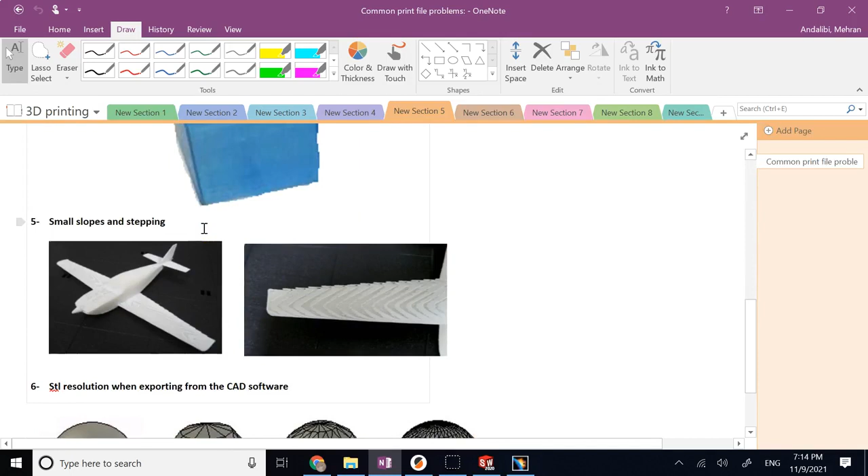Hello everyone. In this video, we are going to talk about some common errors and mistakes that exist with print files that you want to either 3D print yourself or send to somebody else to 3D print for you. If you can avoid these problems, your 3D printed part would most probably have a lot less issues and look a lot better.

What are they? One of the problems is improper tolerance of joints. So if there are parts that go together and are assembled together, the major thing is you make sure they can be assembled.

Plastic parts are not similar to metal parts, where when the male component is a little bit bigger than the female component, you can use heat treatment and press fit to create what we call an interference fit, where the two parts are hardly separated from each other.

In plastic parts, it's not that easy. Plastics do not have as much thermal expansion as metal parts do. So if you make the bottom part that needs to go inside the top part a little bit bigger, it's not so easy to assemble it.

And if you apply too much pressure, these plastic parts will definitely break and deform. So you need to make sure that most of the time it's either a clearance fit, where the male part is slightly smaller than the female part, or very close so with reasonable force, without breaking the parts, you can do a transition fit. But definitely an interference fit is not a good idea with plastic parts. That's problem number one you see in assemblies.

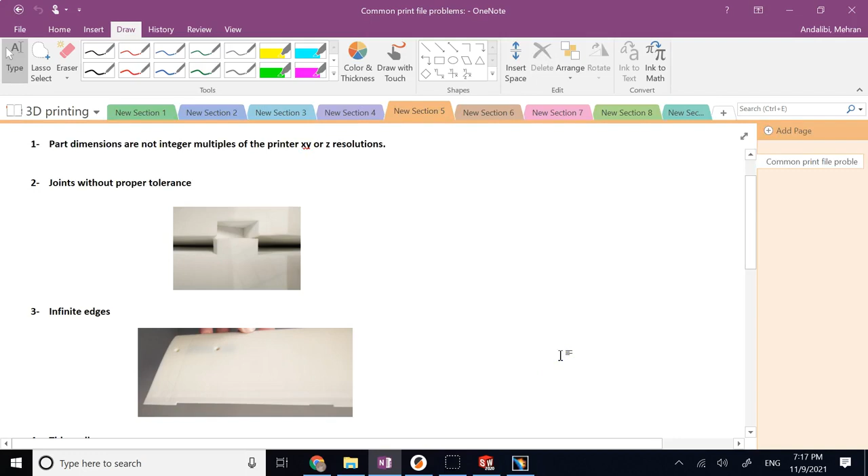The printer could not print it, or there was failure during printing those very sharp, thin edges, as you clearly can see here. Some parts of the trailing edge of that wing are missing, it was not printed. Here I'm going to show you a demo of that.

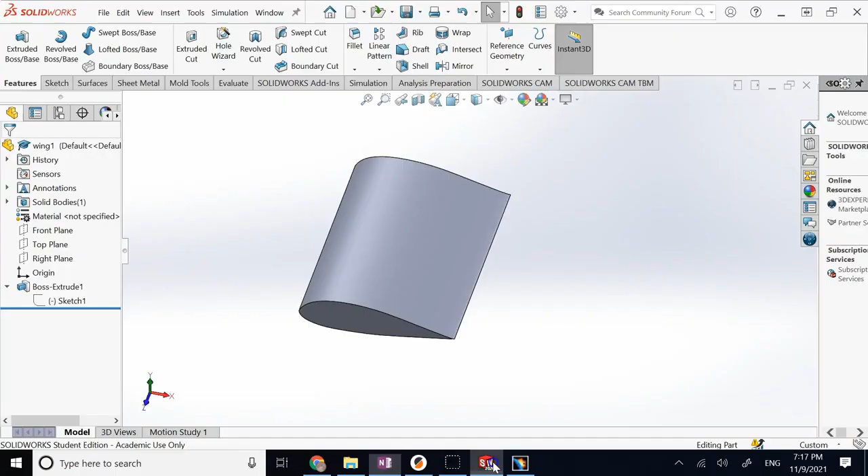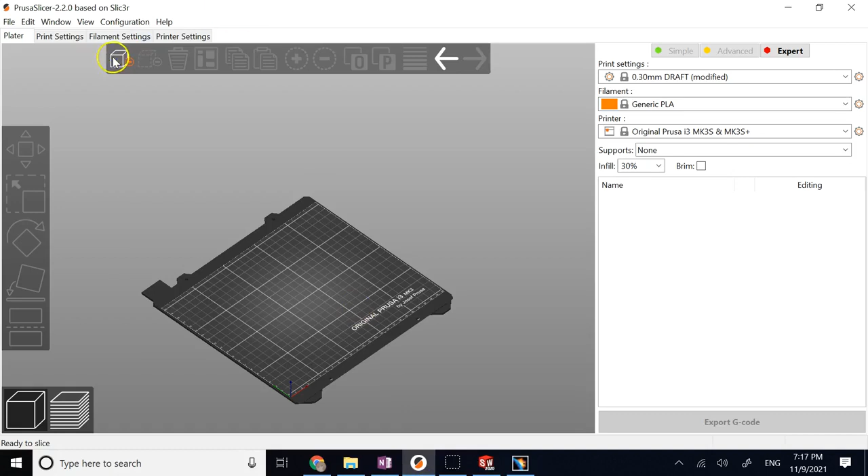So here is a wing, a simple wing, of course not super realistic. I made this trailing edge very sharp and very narrow at the end, deliberately. So if I go ahead and export this as an STL file and bring it into my slicer software, let's see what happens. Here I bring it in and print it upright to avoid any support.

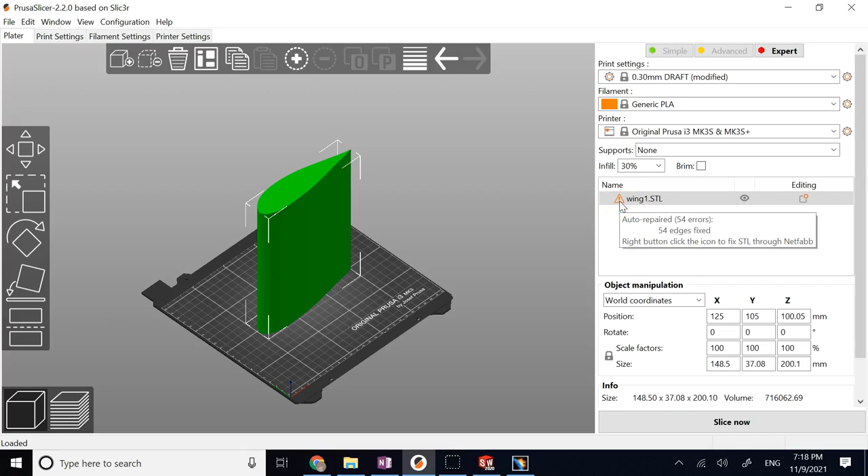First of all, you see right off the bat it gives me an error. There are some edges which definitely have errors. If you ever see this - and I'm going to address all of these issues and everything you need to know about Prusa Slicer in a separate video next - but if you see that exclamation mark, it means you have to fix the rest of the errors. There are probably non-manifold edges or other errors you have to fix. So do not slice right off the bat.

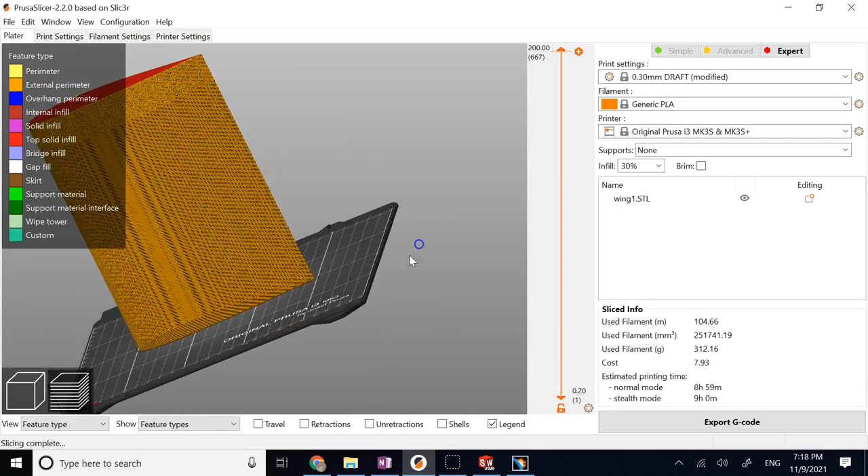Right click on this and let it repair those edges. When that goes away, go ahead and slice. Now see what happens when I look at this. This is the skirt, this dark brown one, but let me go to the very base of the part here, so now you clearly can see what is happening to this edge.

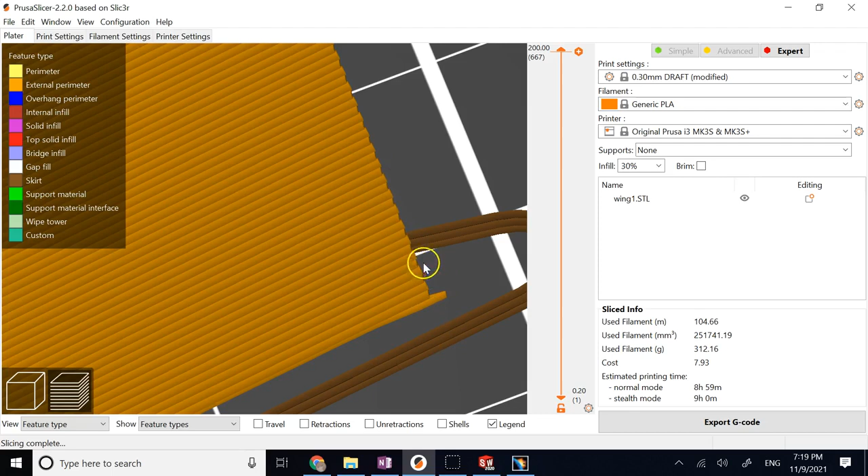First of all, on the first layer it could get it as sharp as possible, but on the rest of the layers, you clearly see some parts of the trailing edge is missing. And if you look at all of this jaggedness, that means this edge is definitely not going to be a clean edge. You clearly see the rest of it is missing, it's just the very bottom of it that you can get.

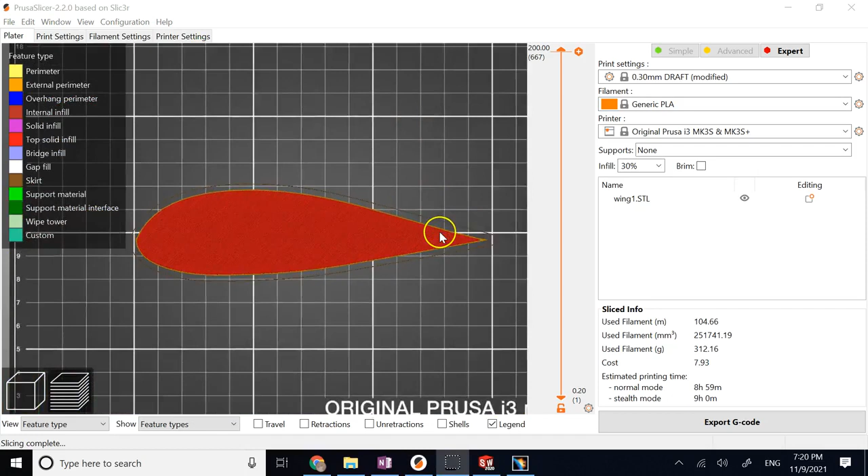And I'll show you the top view, and if I zoom again at this trailing edge, you clearly again can see that there is this area here.

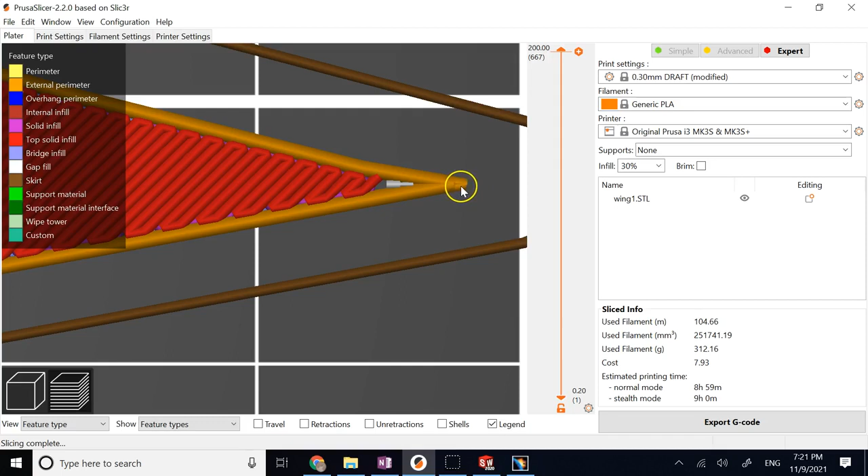You see this line? That is where for the first layer it could print the sharp part of the edge, a little bit of it, not even the entire part of what you have in CAD, but for the rest of the layers it couldn't.

Now when I switch from the slice mode to the 3D editor mode, see that this edge extends, okay? But when it came to printing it, it had to cut a portion of it off because that was too sharp and too narrow for the printer.

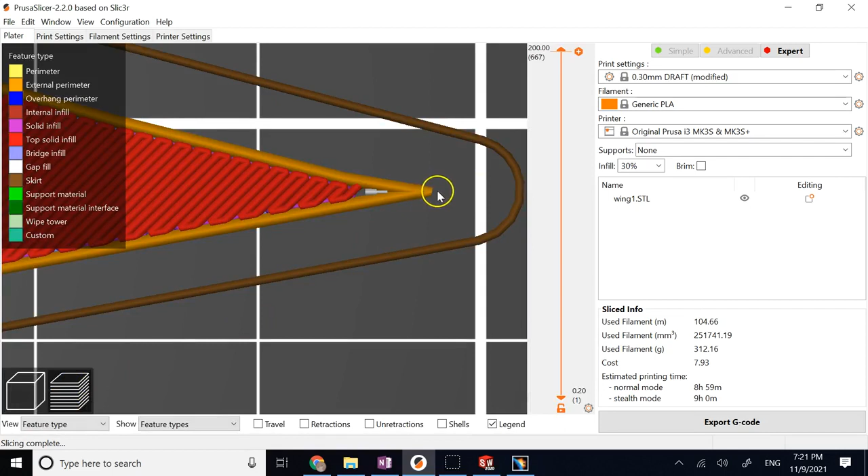Look here, you see the difference that this tip point has with respect to my grid line of the printer bed. And now look here, you clearly see this gap is definitely bigger than what you have here. So this very sharp end of it, from this point to the right, it could not print.

The best it could do is try to get closer to it in the first layer, but for the rest of the layers, you definitely have a failure.

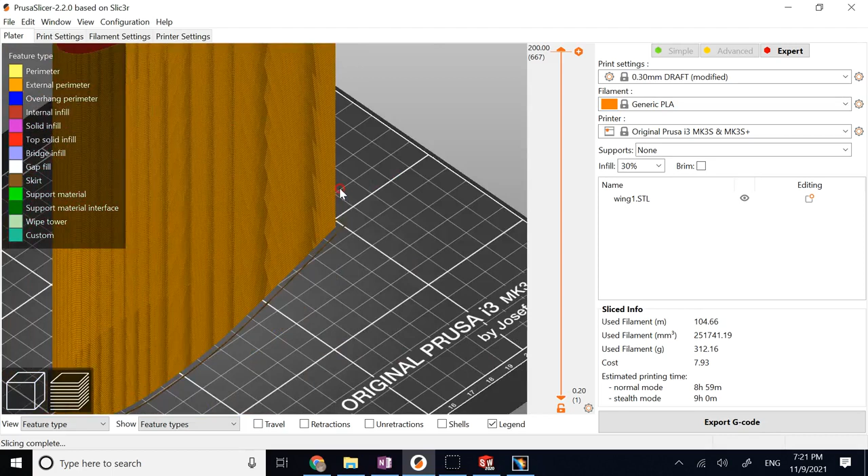Even if you try to improve it a little bit, there is still always the chance that you get a very bad edge or some parts of the edge missing, as I said. Call it an infinite edge. So if you want to avoid such a thing, make sure the very tip of very narrow areas like this, you try to cut it, put a chamfer to it or something to avoid that sharp of an edge.

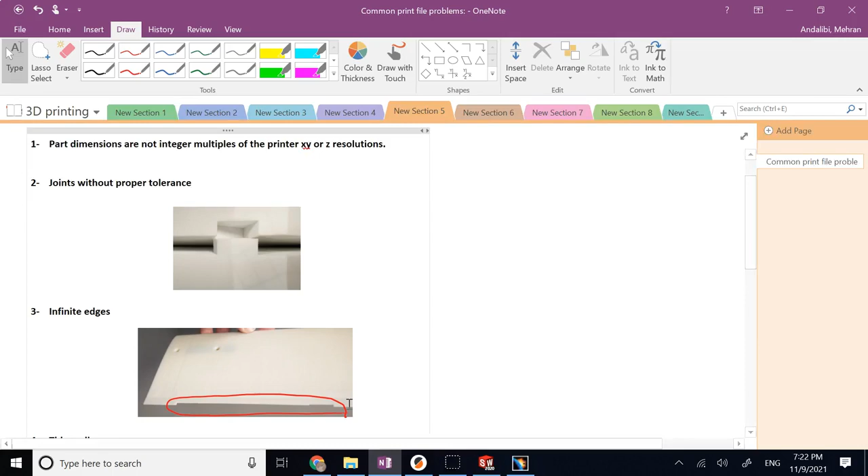So if I want to go back here, right? As I said, either you can apply a chamfer or you modify your sketch. You see clearly my sketch is definitely way too sharp.

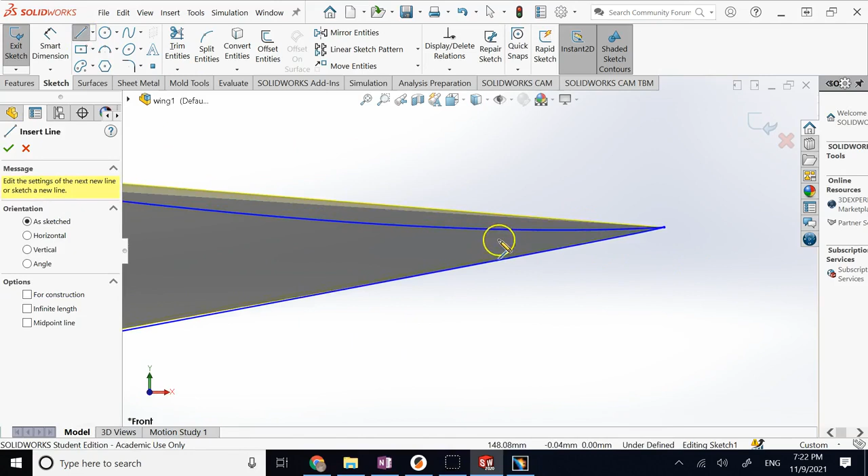If I wanted to modify this, I bring a line here in SolidWorks and try to just cut from this part on. Draw a vertical line like this, and then trim the rest of it like this.

Okay, so now it is definitely a lot better. It's not going to be as sharp as that, and hopefully it can handle it. Again, most probably not so much, because this edge that I made is still in a very sharp area, right?

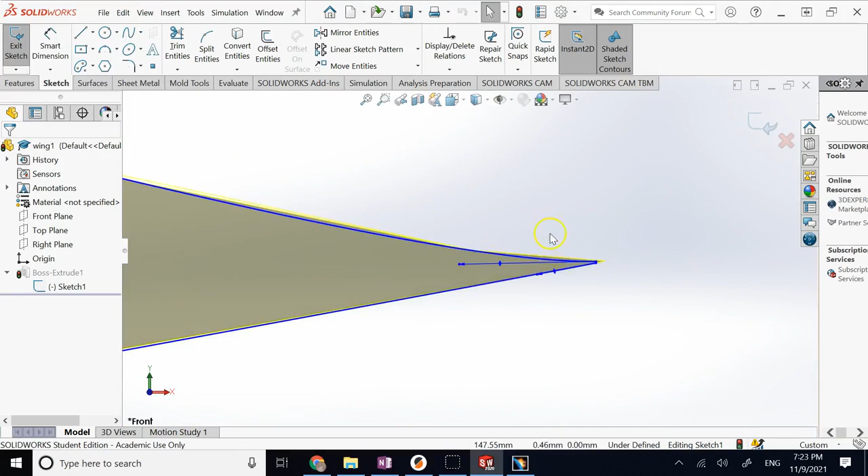But if I can show you, maybe I can move it a little bit further to the left. Let's see. Okay, most probably this is going to ruin my profile.

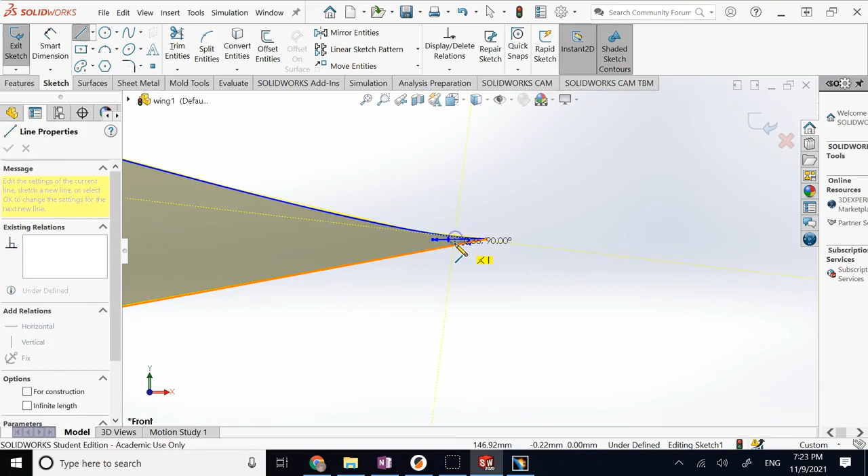So what I can do is go ahead and bring the line further a little bit more to the left, so maybe something like this. Okay, and then retrim again the rest of it.

So make sure that you do not really leave something super sharp behind. And now, you see, that's a lot more reasonable this time, hopefully.

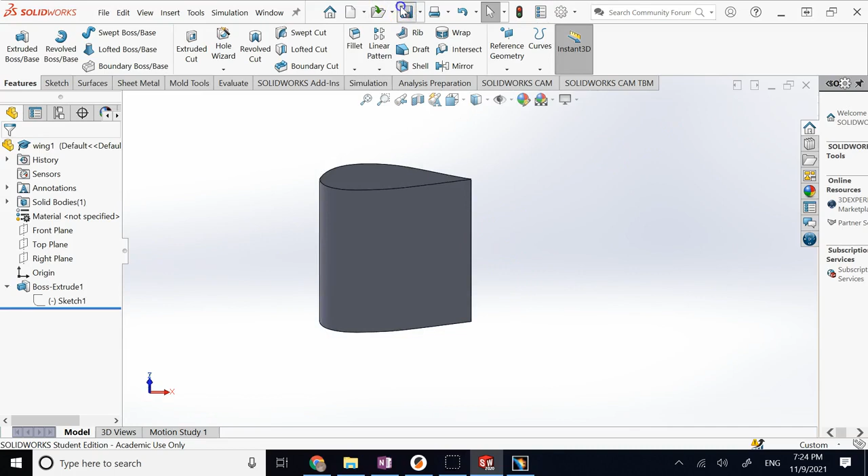Let's go ahead and save it and export it as STL again, override the previous one, and then re-slice it, and you'll see what's going to be the difference.

So here I bring it again. If there is an error, again, I make sure I repair it, slice it. And now let's go ahead and check the bottom here. You still see there is a little bit of that left, as you can see.

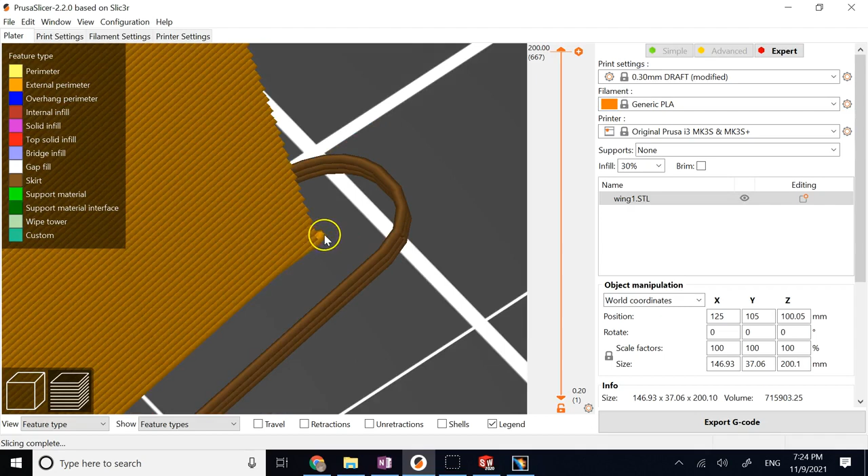You absolutely see there is still not an amazing job, but if I look at this guy from the top now, in the slice model and in the 3D model, there should not be a huge difference between them.

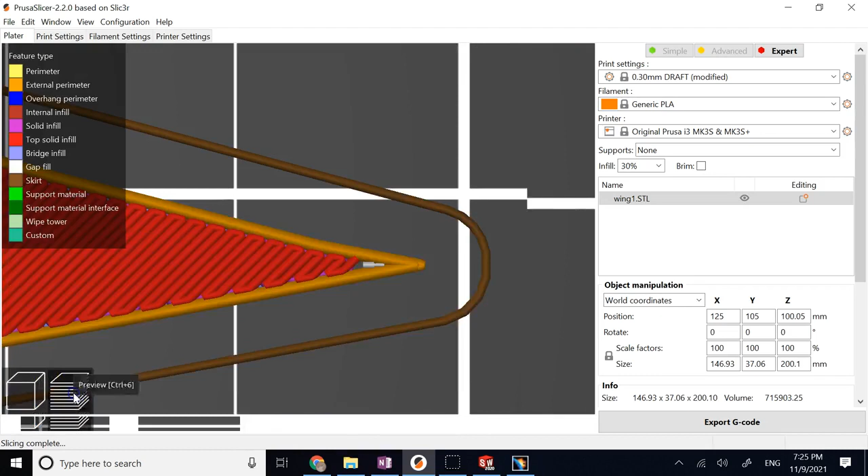So you see now they are quite closer to each other, right? There is not a huge difference between those two gaps that I showed you.

And again, if it's still too sharp, I would trim it a little bit further back, right? So just go back here and redo that.

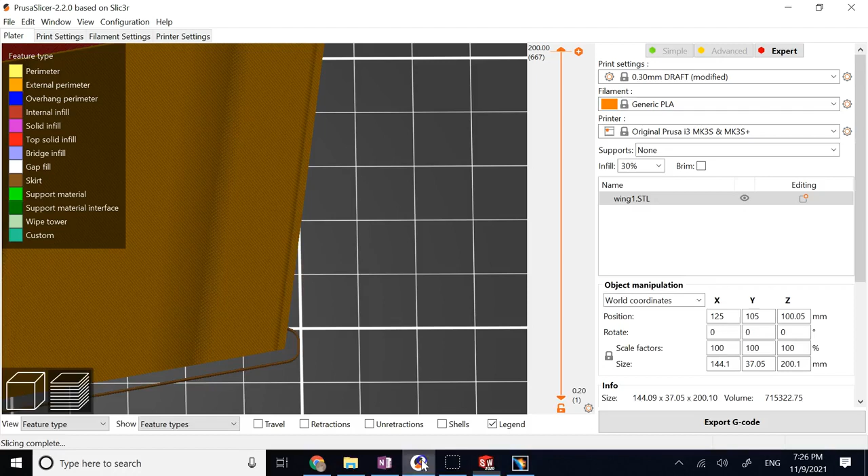Here we go. So I trimmed it a little bit further, and now you clearly can see that I don't have any discrepancy at the bottom layer, right? And the edges, the end of the layers seem to be very well aligned with each other, right?

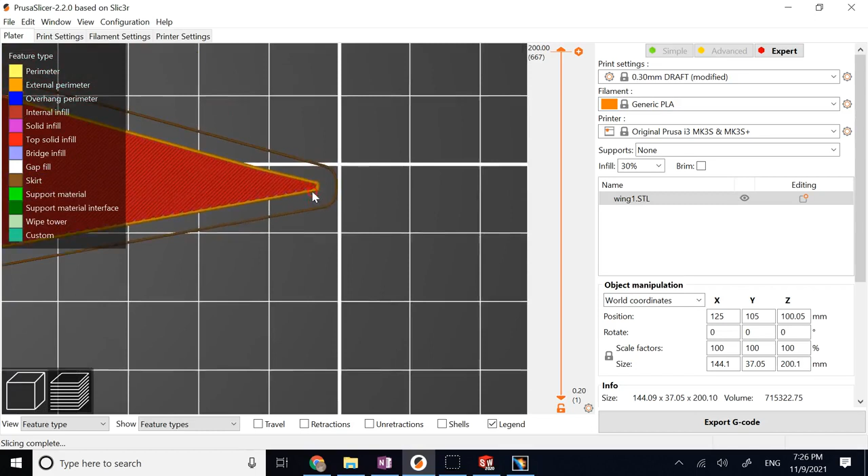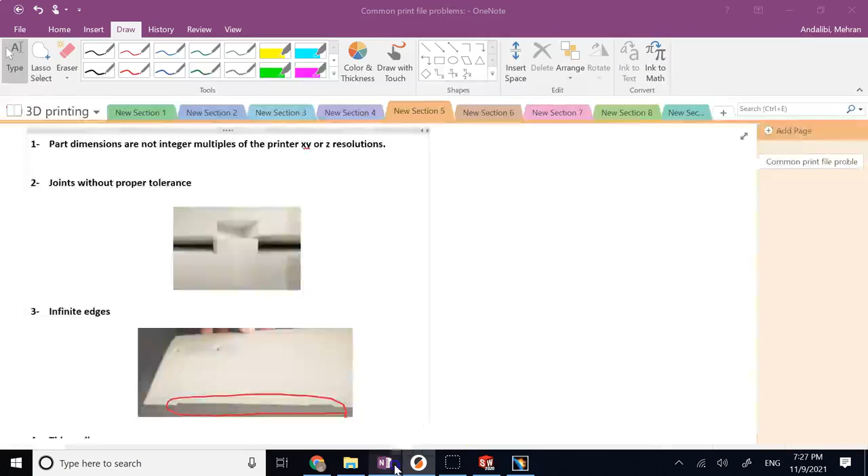And if I look at it again from the top, there should be really no difference anywhere between the layers, and then between the 3D model and the layers. Okay, so make sure to avoid infinite edges.

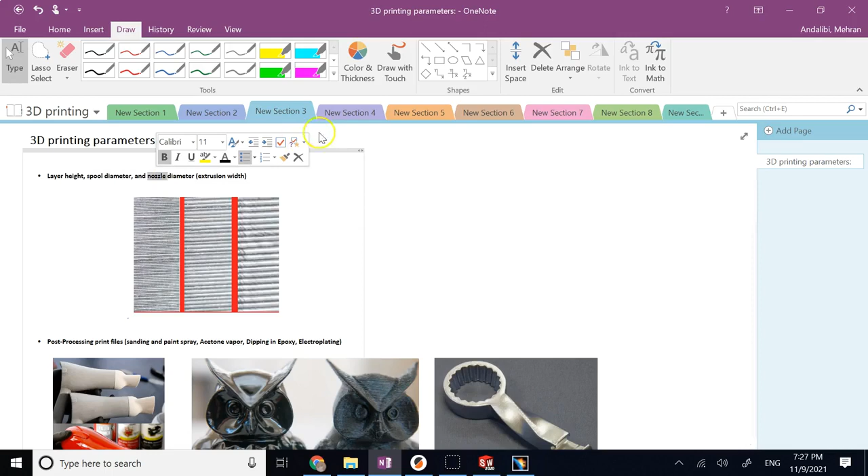Now, another important thing is the dimensions of the part. Remember that, as we discussed in our previous video about the 3D printing parameters, we have a layer height and we have the nozzle diameter, and those will determine the resolutions of X, Y, and Z plane.

So if your nozzle is 0.4 mil, that means the minimal thickness you can achieve on the XY plane, on any flat plane, on any layer is 0.4 mil. And if the layer height that you choose is 0.2 mil, that's the best you can get. So you have to make sure the overall height of the part is an integer multiple of 0.2 mil, and any dimension in the X and Y is an integer multiple of 0.4 mil.

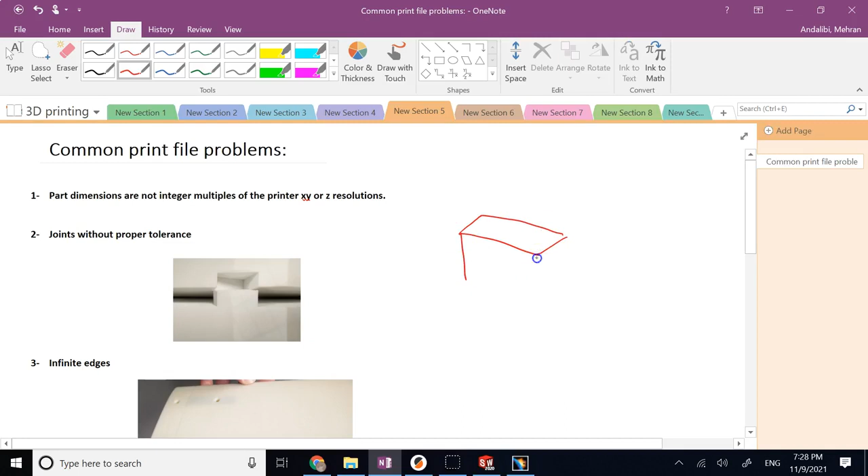Let's say you have a simple cube that you want to print upright. This width has to be an integer multiple, like n times 0.4 mil. And this depth also has to be n times 0.4 mil. Now, it might not be the same n, so you might call them n1 and n2, because along the XY plane, where the width and depth fit, there is a 0.4 millimeter thickness or diameter of the molten plastic. And the Z, or height, should be another integer multiple, n3 times the layer thickness. If the layer thickness is 0.2, it should be a multiple of that.

Why is this important? Because sometimes I see students make parts and submit them to our lab for printing, but they make this width to be, let's say, 12.1 mil, and this other dimension to be 5.3 mil. Well, the problem is this: 5.3 is not an integer multiple of 0.4. The same thing for 12.1.

So what's going to happen is the printer has to skip a layer or add a layer, and it does it by rounding. So for this case, it would round this to 12, the closest integer multiple of 0.4 to that number. And for this one, if it rounds it, it rounds to the closest multiple of 0.4, which is like 5.2 in this case. So the dimension that you will actually get for that W and D you designed is going to be 12 by 5.2, not 12.1 by 5.3.

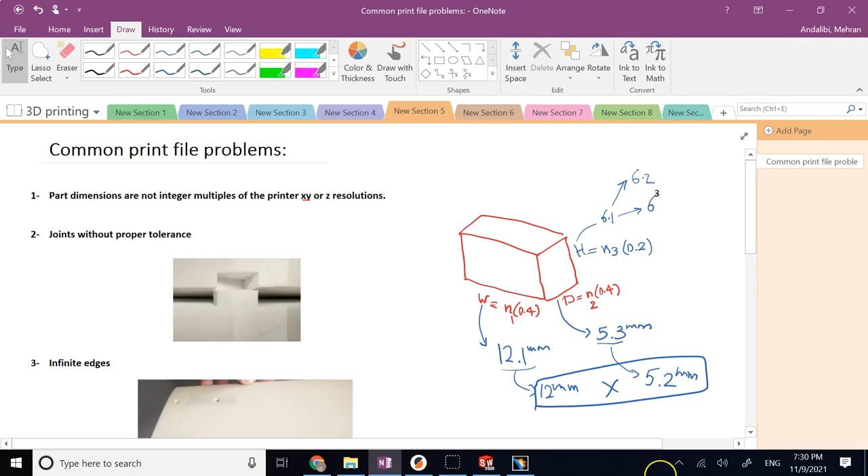And here I'm going to show you that in an example.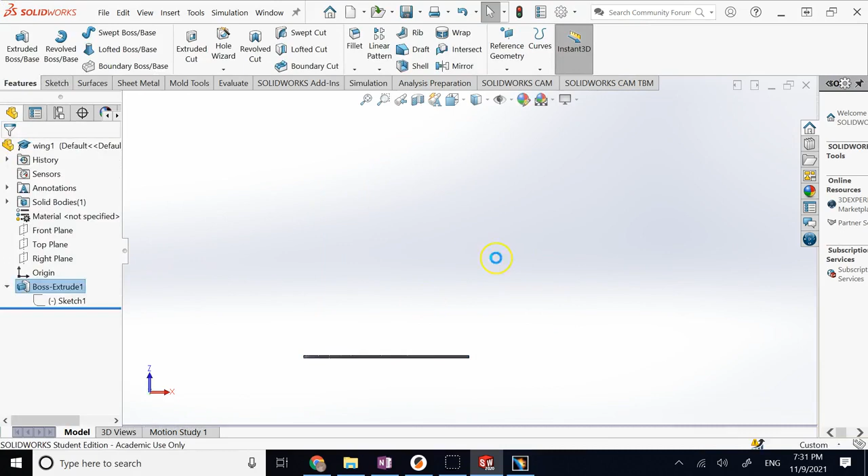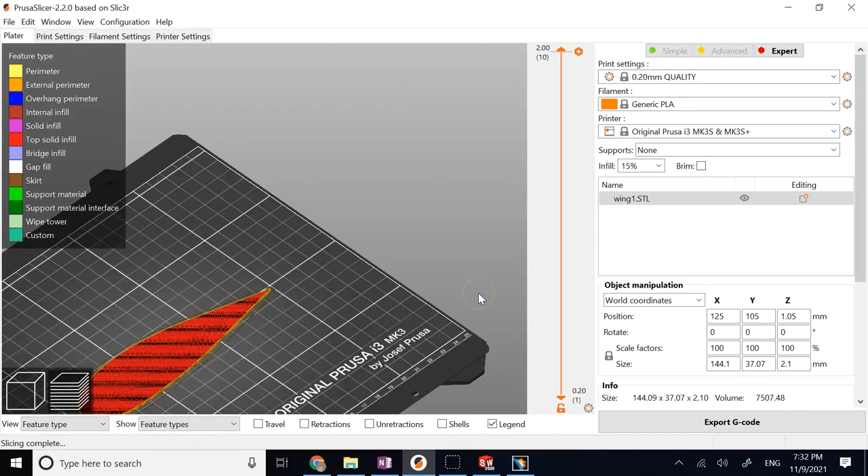So here I'm going to make this part, it's a little bit too tall. Let me reduce the height of this. So I make the height maybe 2.1 mil, something short like this, flat. And then I'm going to save it again as STL, import that flat piece, and now I'm going to slice it. I expect the overall height to be what? Let me change this to 0.2, which is the layer height I said you can normally have on a Prusa, although you can go further down. But here I did that.

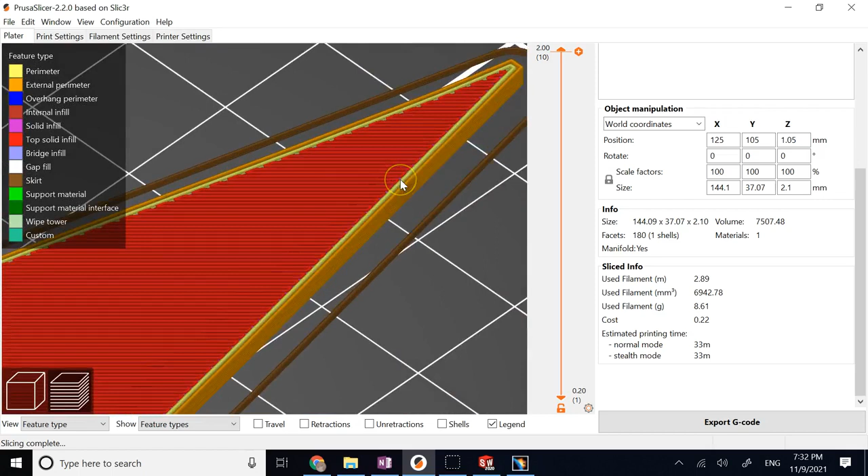What's going to happen here? You see clearly the Z direction, the height of the imported part is 2.1. Now, will you get 2.1 in the real world? Let's go ahead and count the layers. So we count each layer we get and multiply it by 0.2. Starting from here: 1, 2, 3, 4, 5, 6, 7, 8, 9, and 10. So you will get 10 layers. And 10 layers times 0.2 is 2 mil, not 2.1. You see?

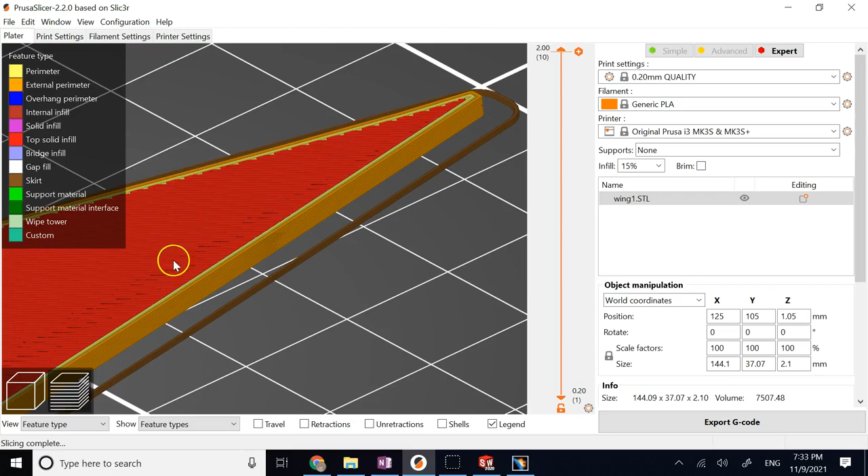You cannot get half a layer. You either get no layer or one layer extra. So definitely that's not a good idea to go with the dimension of 2.1. And the same thing happens again if you choose the other two dimensions not to be an integer multiple of 0.4. So make sure that you choose your dimensions right.

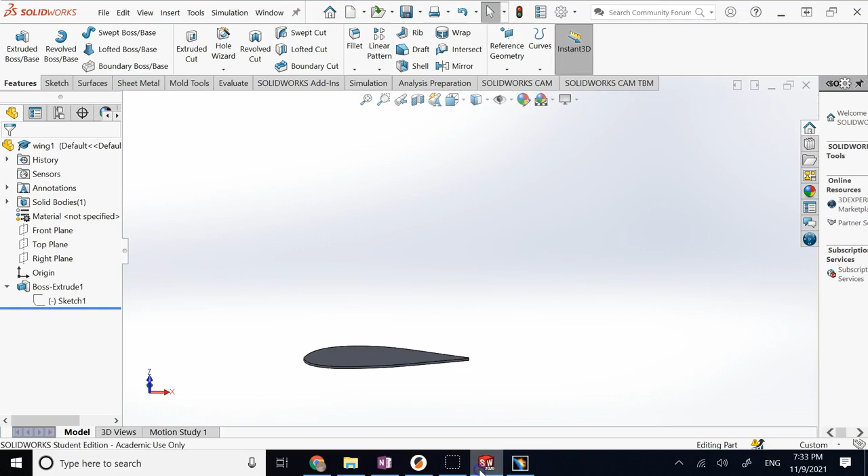One other thing that many people choose and want to print, which I mentioned in my previous video, is parts that are shelled with very, very thin walls, like as thin as 1 layer. That's absolutely not a good idea. So you might have this part and shell it with 1 layer, like 0.4 mil. Here I made it a little bit taller and exported it as STL, and let's go ahead to the slicer software and try to slice this very thin-walled object, see if we can get anything.

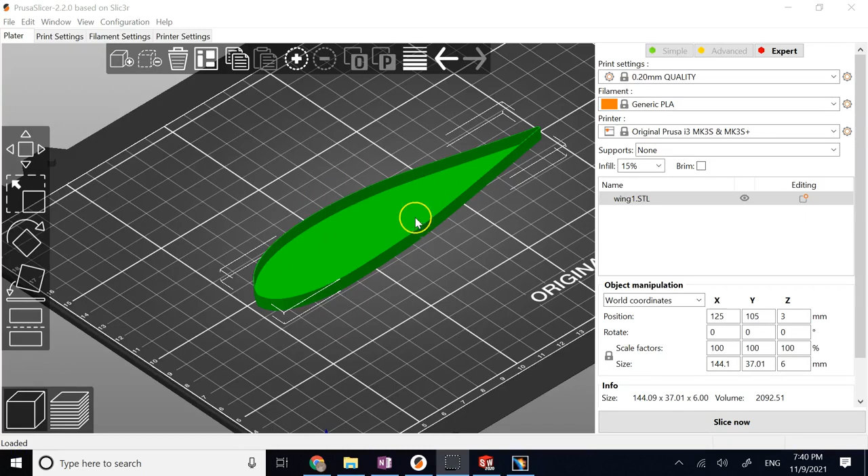So here is the part, that's the STL of it, and as I said, I made the walls a little bit taller. Let's go ahead and slice, and you're gonna see something interesting. First of all, it cannot even get the walls for you. Although they were 0.4 mil, in the software setting, if you go to print setting and look under advanced, you see that the default extrusion width is actually a little bit more than 0.4.

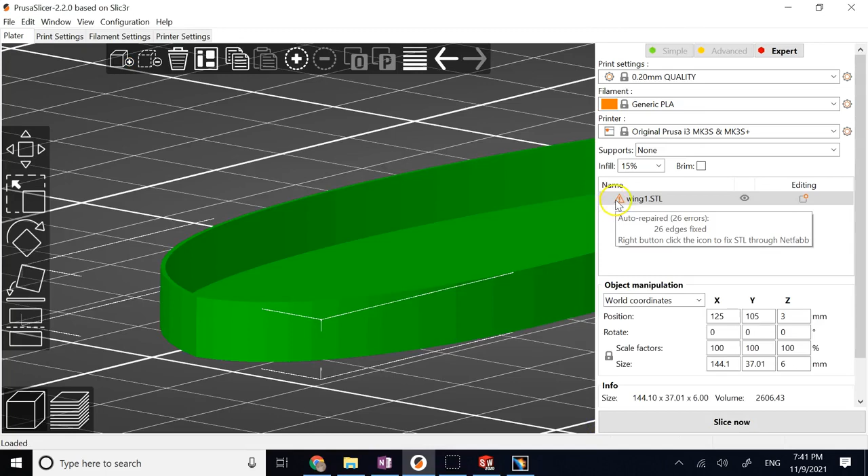By adjusting the speed of the print, you can even change that 0.4 to something a little bit more or a little bit less. Because this one is 0.45, that means you are not even getting that 1 layer. So I have to go back here and change my shell to maybe 0.45 or 0.5, make it a little bit thicker, so hopefully it can give me 1 layer. And even if it does get to slice it, it's absolutely not a good idea to print something that thin.

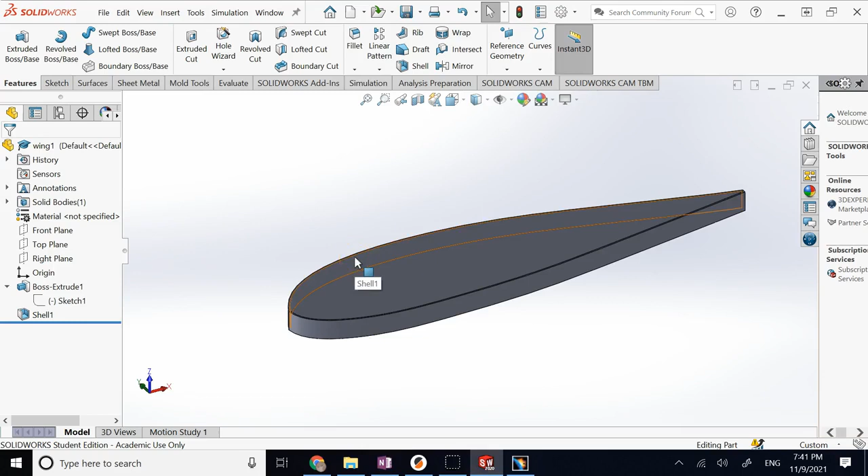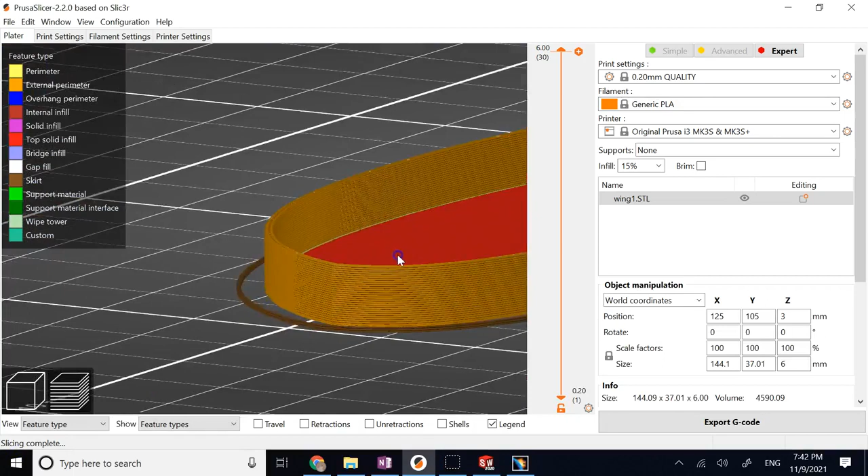As I said, by no means go for designs like this. Make sure the shell thickness is at least minimal 2 layers. Definitely if you want something here, 2 times 0.45, you want 0.9. That's like the minimal thing you want to avoid artifacts like that. And here, that's what you can see - I changed it to 2 layers. So now at least you're not going to get discontinuities in the print, and hopefully it lasts a little bit more, although definitely not really some wall that you want to apply any force or anything to, but at least it can print it. So keep that thin walls in mind.

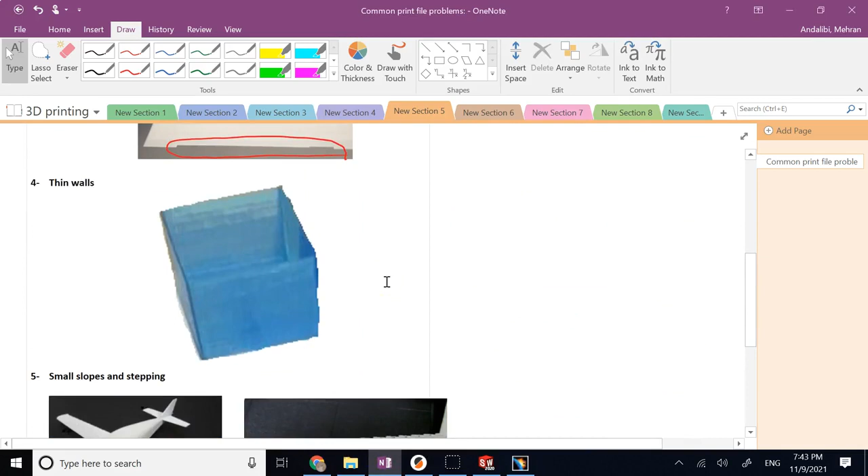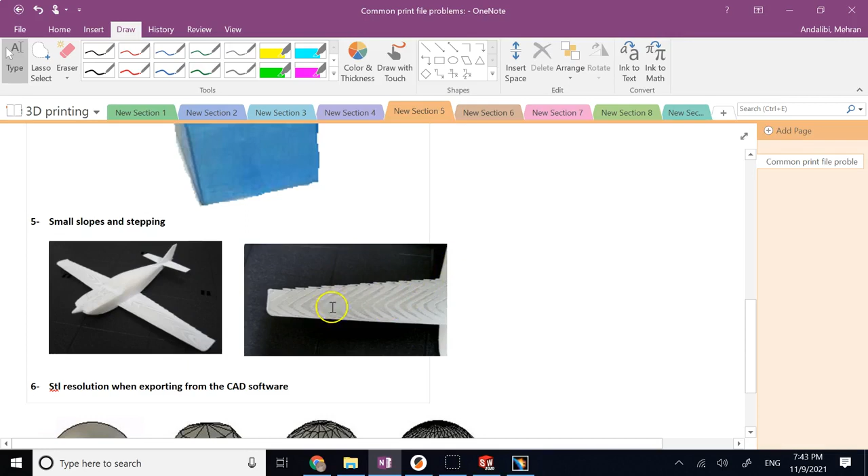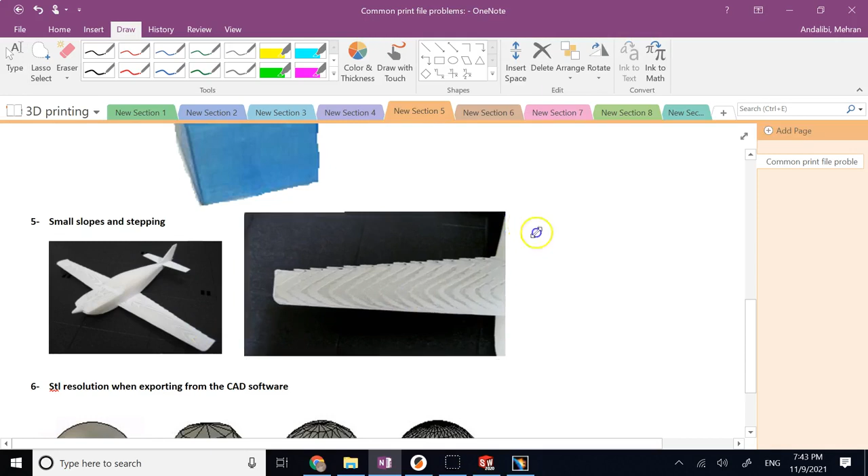A couple of other things. One is small slopes. If the part you have has small slopes in it in the Z direction, remember your printer goes up by 0.2 mm or so in each layer. If the slope you are trying to print is very mild, just a few degrees or so, then you are going to get something like this. Let me make it bigger. You see this kind of step type behavior, the discontinuities - this is called stepping.

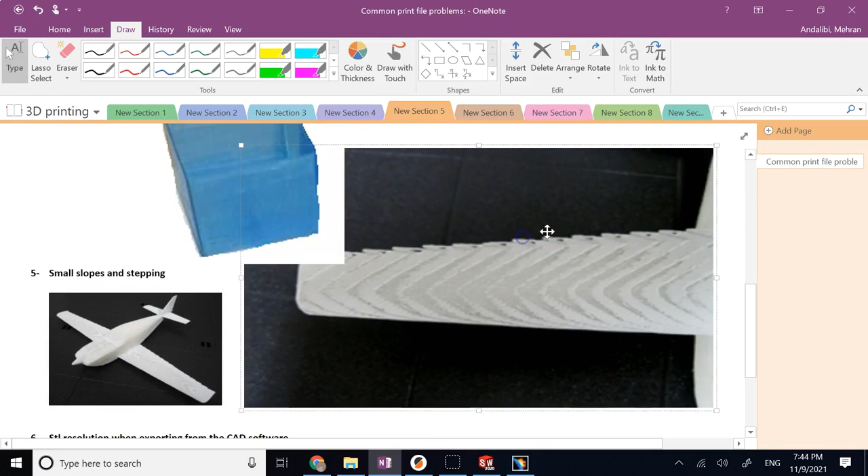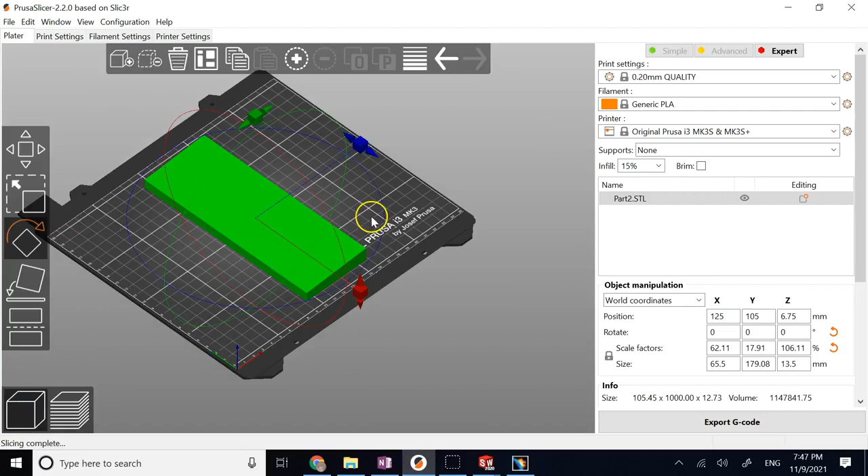Here to show you a brief demo of what's going to happen in the software - I made this kind of almost flat part, but with a very gentle slope, just 2 degrees. With this small draft angle that I provided, now I'm going to get it into my software, and here I resized it to fit the print bed.

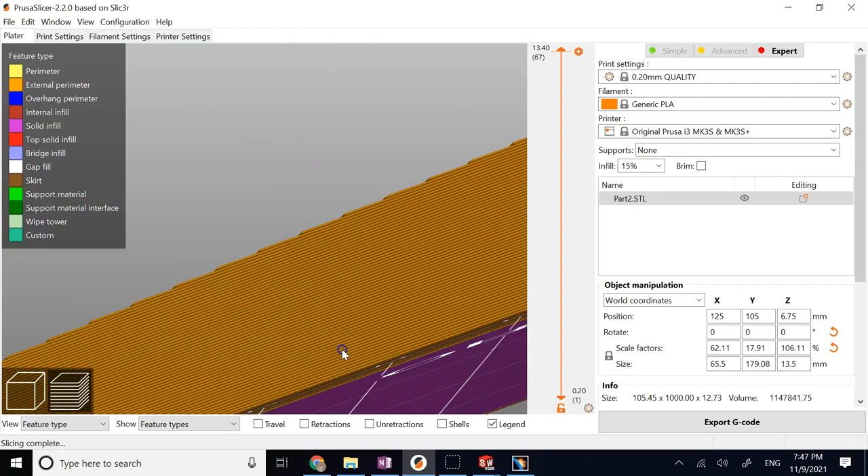And then if I try to slice it, which I already did, you clearly can see if you look from the side, this stepping behavior - you can see it right now very well. Let me see if I can show you from a good direction here - you clearly see these jumps, this stepping behavior, okay? So it's gonna be something like a xylophone or so.

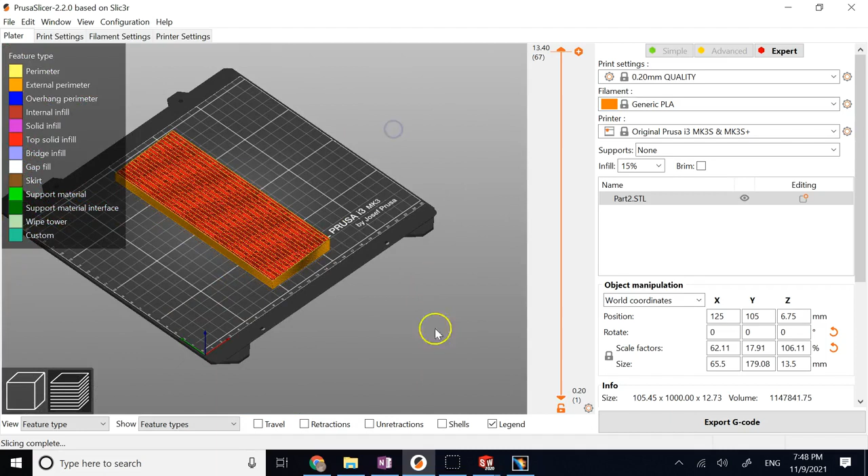So that's the problem with small slopes that you have to keep in mind. Your printer cannot achieve all of that. If you want to get it a little bit better, you definitely need to bring down your layer height.

If I go to ultra detail, I probably get it a lot nicer. Of course, it means a lot more printing time, but at least it gives me a lot less stepping effect, just like what you saw. So here I'm trying to slice it with 4 times smaller layer height, and hopefully the top surface is not going to be as bad as what you just saw.

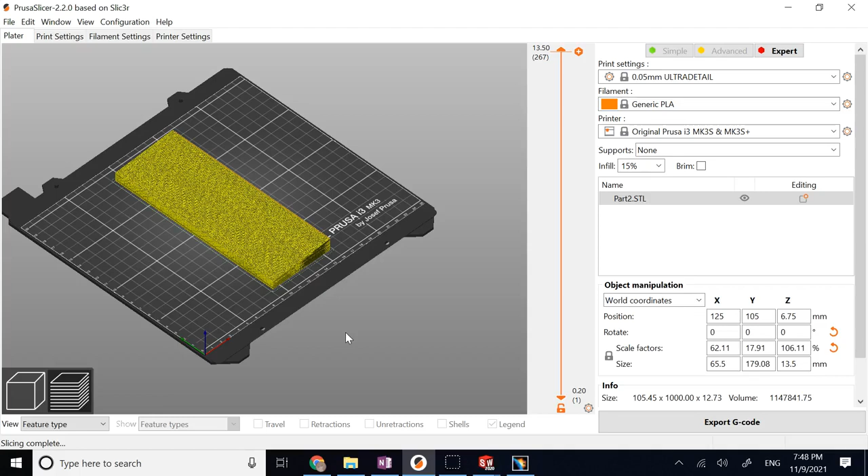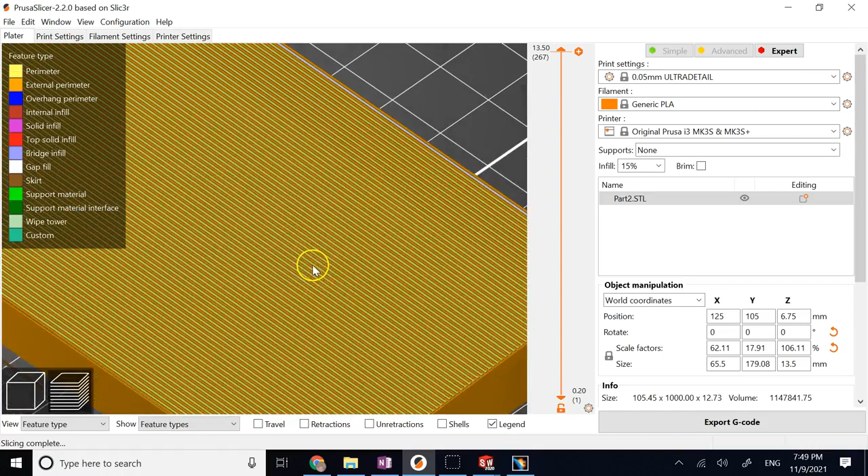There we go, seems like it is sliced. Now if I look at it from the side, you still see it if you zoom a ton, but definitely you have to zoom a ton. If you look at it from the top, those layers are so small that the stepping effect is much less. But if you have the bigger slope, you're not going to see as big an effect as you just saw with the smaller slope.

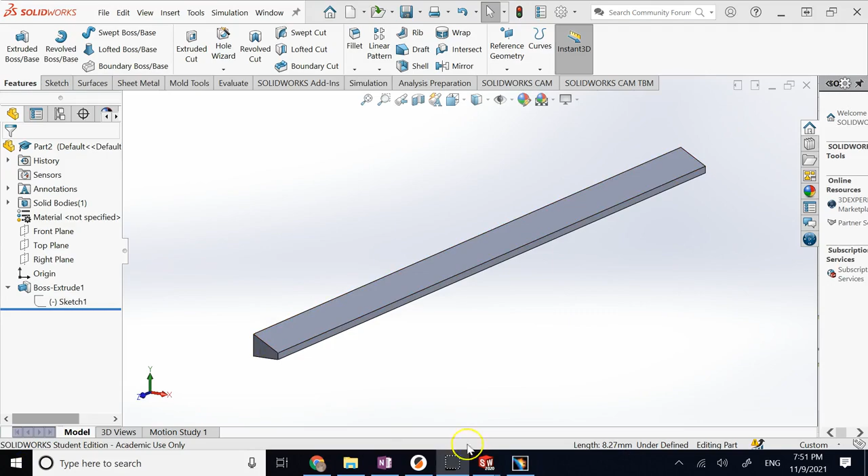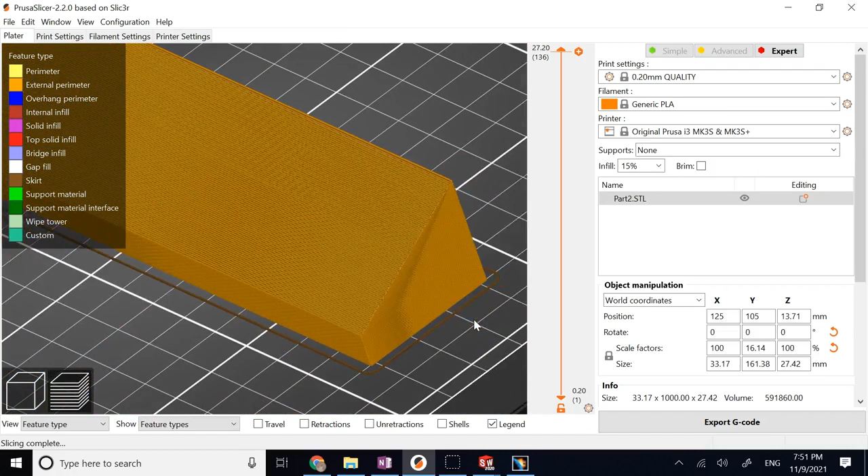So here I changed that draft angle to 30 degrees instead of 2 degrees, and brought it back into the slicer software, using the same layer height of 0.2, not the ultra thin 0.05. You see the stepping effect is much more tolerable compared to what you had at 2 degrees, right? So definitely smaller slopes are not a good idea, especially with a layer height that is not ultra thin.

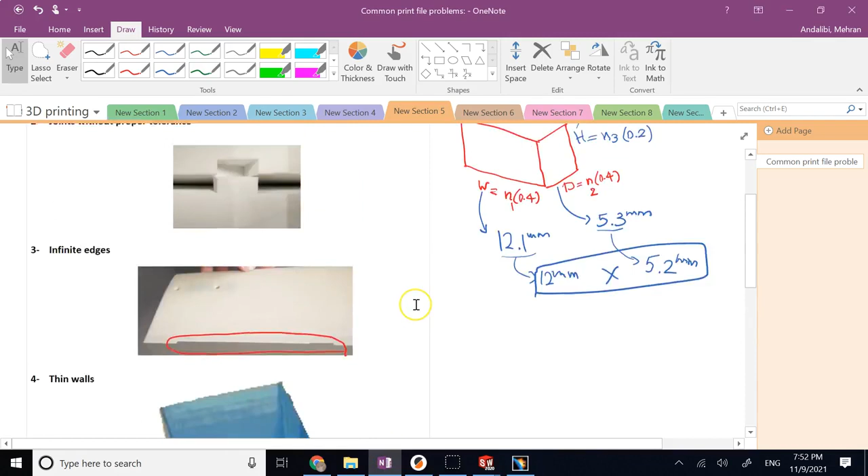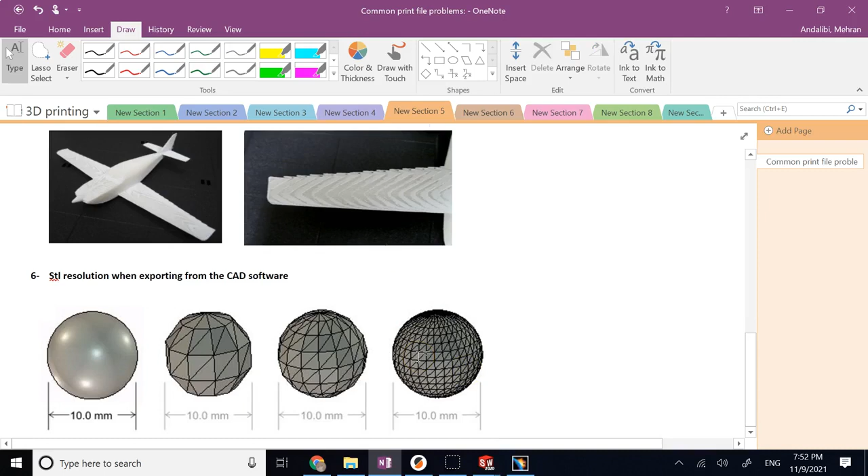And when the STL you exported is rough, the software doing the slicing cannot do magic - it can never give you a good print. You are never going to get a good print if the STL you import is a bad STL. So to show you the effect of STL resolution, here is a part a little more complicated than the wing, and I'm going to 3D print this coordinate frame.

I'm going to save this as STL. So I go to STL and then save it. And then I make a version called coarse and a version called fine. But where is fine and coarse? How do you change the resolution of STL files in SolidWorks?

So when you choose your file type to be STL, you go to options. In the options, you can have coarse mesh, fine mesh, or custom. So here I go with the fine mesh, using a bunch of points, and call it version fine axis.

You clearly see it uses 6600 triangles and the file size is about 331 kilobytes or something - not exactly, because each kilobyte is 1024 bytes, not exactly 1,000. But this is the fine mesh.

And now again, I go and resave this as STL, but this time as a coarse mesh. You'll see when I bring them into the software, some big differences. So this is coarse mesh.

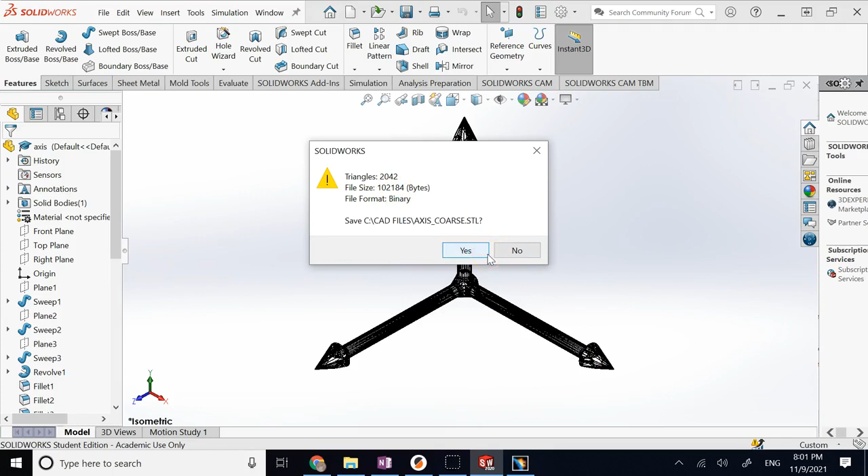Now you see, it is only 2,000 triangles instead of 6,600, and the file is about a third of the volume it used to be. The mesh is coarser - I can even make it coarser if I want. Still not crazy coarse, but much coarser than last time.

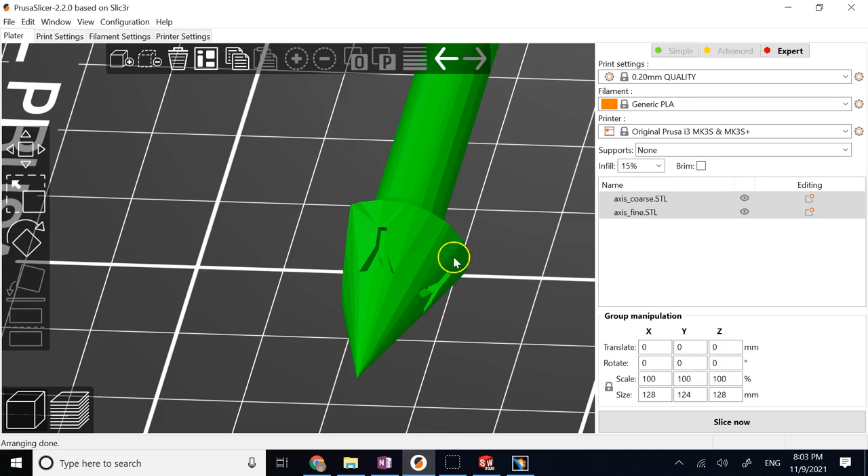And now let's go to the slicer software. Here are both of them imported. This is the finer mesh - look at the surface. And this is the coarse mesh. Look how bad it is already, without even trying to print.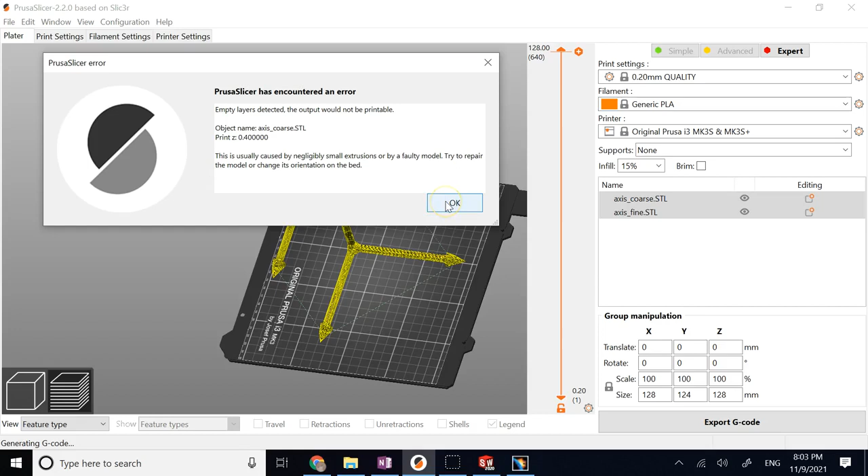And this coarseness - look at the shaft here, look at the cross section of it and compare to this one. It's much finer, and when you slice that, it shows itself even more. So clearly you see there are some empty layers detected, right - it is outside the print area. Seems like it's not happy.

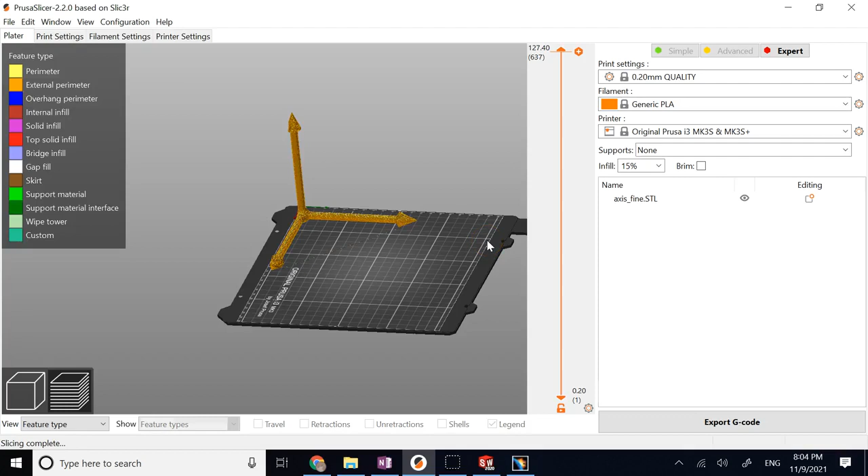And if I print it with the fine mesh, you see there is no problem - it doesn't even pick on me. I can absolutely print the fine mesh, no problem, it can do it. But when I import the coarse mesh, look here, trying to slice it, you see it gives me an error.

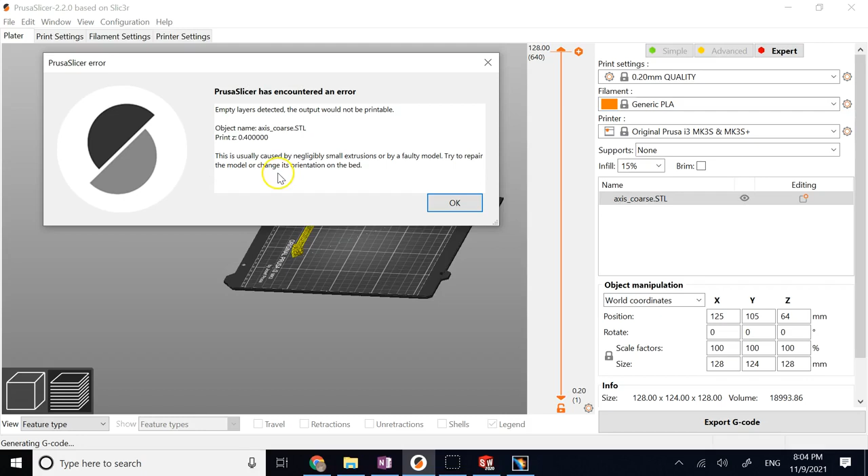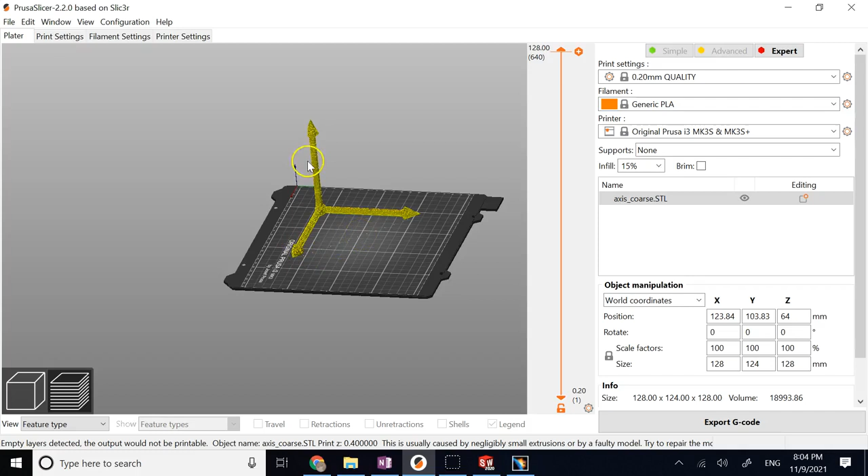There are some problems. It didn't find an error in the beginning, but now it cannot even print it. The mesh was too coarse that it cannot print some of those jagged areas. So a coarse mesh is absolutely not recommended. Sometimes it cannot even print it if the geometry is complex and has sharp edges and abrupt discontinuities. And even if it can, it's going to give you a very bad surface.

So changing the resolution of STL to fine mesh is definitely recommended. This was for SolidWorks, and some of you might use CATIA and ask, how would you change the resolution of the STL file in CATIA? Well, in CATIA it's a little bit different.

Let's say if I have this part and I want to export this for rapid prototyping in CATIA. If you go to File, Save As, and save this as STL, it does not give you any option here like SolidWorks to change the STL mesh. What you need to do is go to Tools and Options, then go to Display. Under General, go to Display, go to Performance, and here you can change these factors of 2D and 3D accuracy.

If you make these numbers bigger, you're going to get a rougher mesh. If you make them smaller, you're going to get a finer mesh. So you clearly see, if I go up here, the circle that I have is now converted to — you never get a perfect circle anywhere in a CAD software. They are always polygons, but the size of the polygon will determine the amount of surface quality.

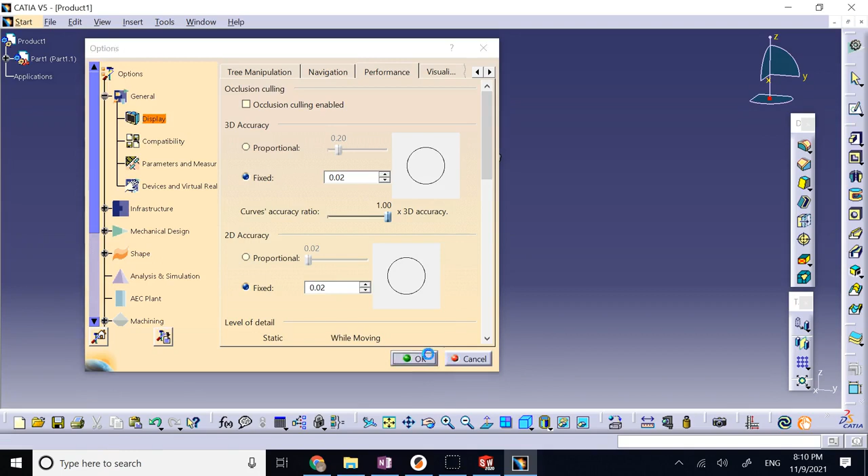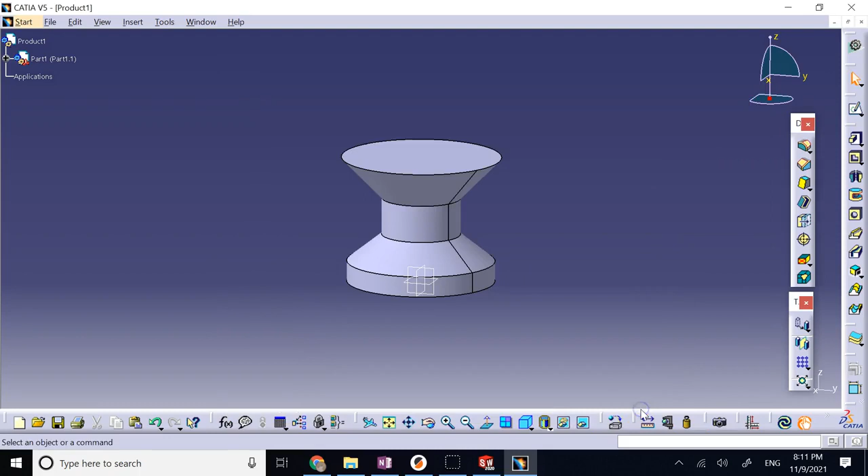Okay that, and now again I'm going to save that as STL, and call it part 3 fine, and save it as STL again. Now let's go ahead and add them to the slicer software. Here are those two files — you see big differences now.

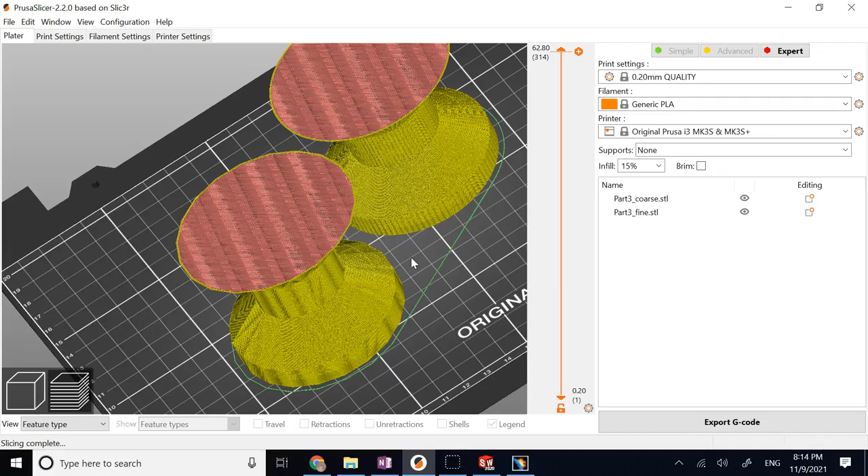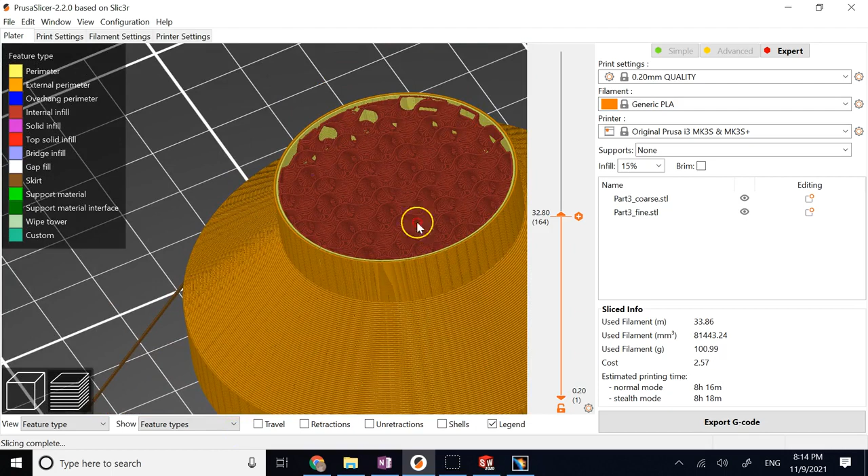See huge differences in the surface quality. And of course, when you slice it, you are going to get different slices too. The software cannot repair the rough surface for you — it's going to make the 3D print even rougher. So do not bring a file with very coarse mesh quality. Look at that — even if you go down, you see the huge difference in surface quality. You see the polygon very visibly here. Here is again a polygon, but with too many sides that you can barely see.

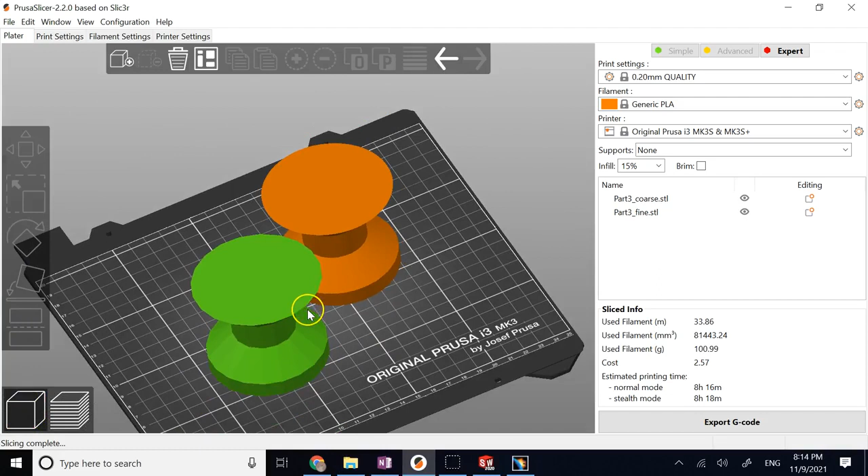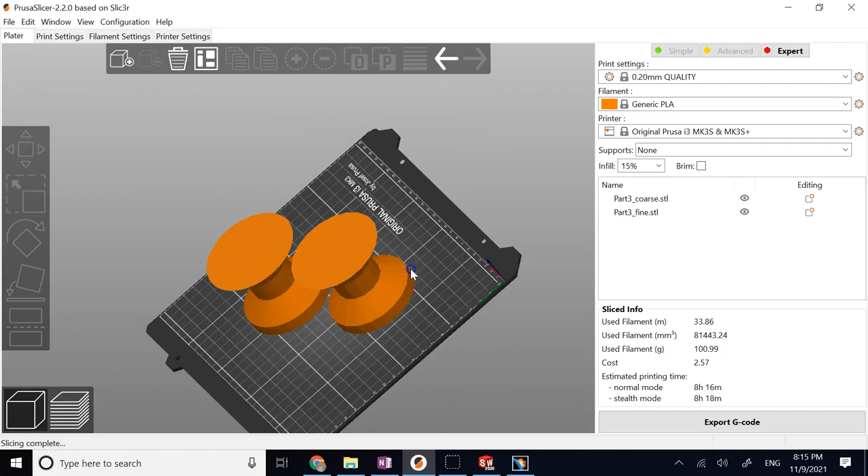It makes a big difference in terms of the volume too. If you look here, this coarse file is like 44, 45 kilobytes, while the fine mesh is like 223 kilobytes — 4 times bigger. But still, none of those numbers is such a huge number for the storage these days and for what a 3D printing software can handle. I have printed parts that were several hundred megs, close to a gig of STL, and Prusa could really slice them and I could print them. So do not bring a bad STL file inside, whatsoever.

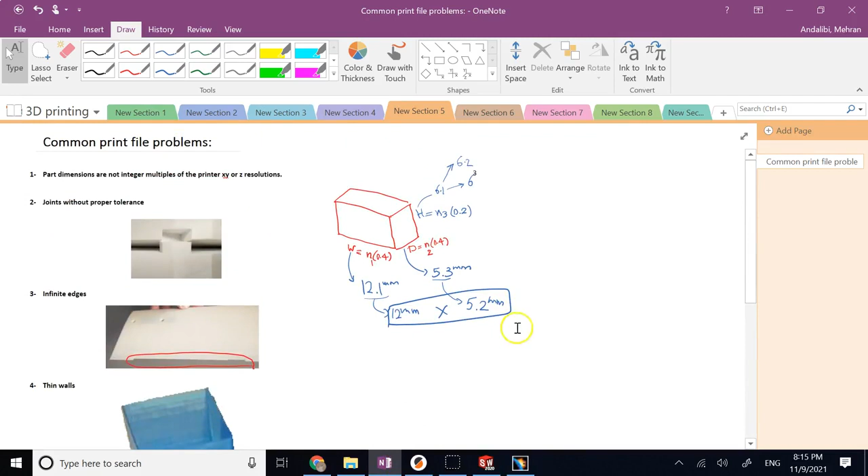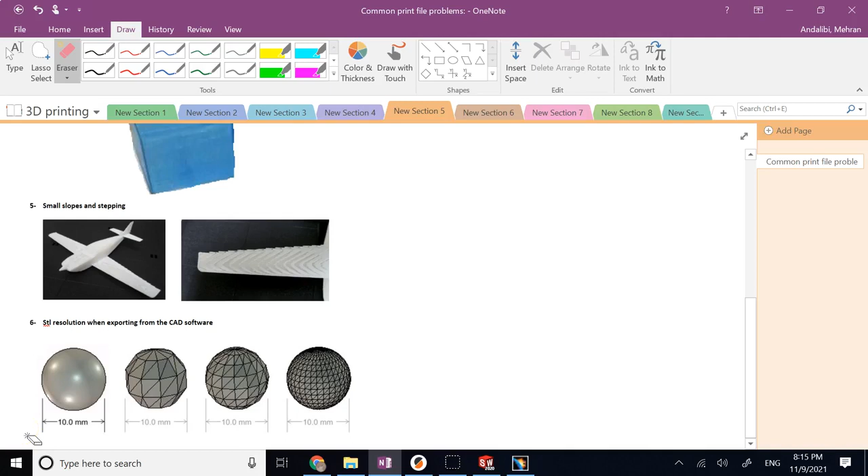Hopefully these 6 very important topics were useful to you and guide you in a direction that, if you try to print something yourself or ask somebody to print it for you, you observe these important rules and get a much, much finer, better end product. So thank you so much for your attention. See you in my next video.